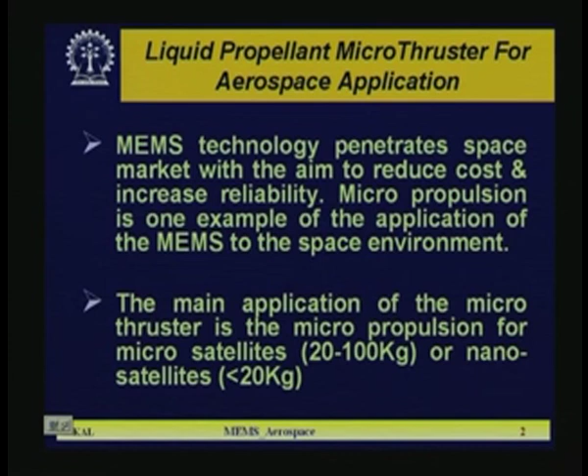The main application of the micro thruster is micro propulsion for microsatellites, meaning those whose weight is within 20 to 100 kilograms, and nanosatellites whose complete weight is less than 20 kg. So for those satellites, how they will be positioned accurately in a particular orbital system using a small sized micro thruster, that we will see today in today's lecture.

Now, what is propulsion? In a broad sense, propulsion is the act of changing the motion of a body. So when you are sending a spacecraft into space, many times you have to change the motion of the spacecraft so that you can accurately position the space vehicle in a particular orbital location.

So changing its motion is done remotely by using certain devices known as the thruster. You have to apply some pressure so that the whole satellite could be moved from one location to another. So the propulsion mechanism provides a force that moves bodies that are initially at rest.

Then change of velocity takes place, that is propulsion. So basically propulsion means it has to change its velocity or motion from rest, so that bodies which were initially at rest will move.

Rocket propulsion provides thrust by ejecting stored matter called propellant. There are various kinds of propellant. Lot of research is going on in propellant, high efficiency propellant. Some propellant examples I will cite today. So that is one major area of materials research in propellant.

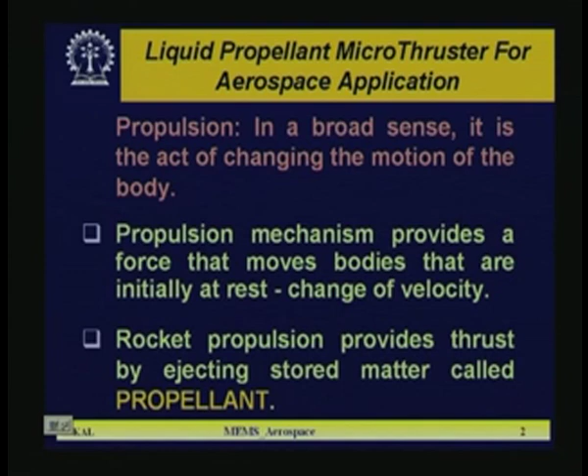Using propellant, how rocket propulsion can take place by using a micro thruster, that we will see today.

Now, what are the issues? What are the different classifications of the propulsion system? They can be classified according to different categories. One is type of energy source, whether the energy source is chemical, nuclear or solar. Depending on the type, different classes of propulsion systems are there.

Second category is basic function, whether the function of the propulsion is attitude control or orbit station keeping, east-west orbit station keeping or north-south orbit station keeping. That is one of the functions of the micro thrusters which use certain propellants, controlling the attitude of the space satellite.

Third one is type of vehicle, which kind of vehicle you are using - it may be aircraft, it may be missile. Also its size, type of propellant, type of construction and method of producing thrust. These are various broad classifications based on which we can categorize a particular propulsion system.

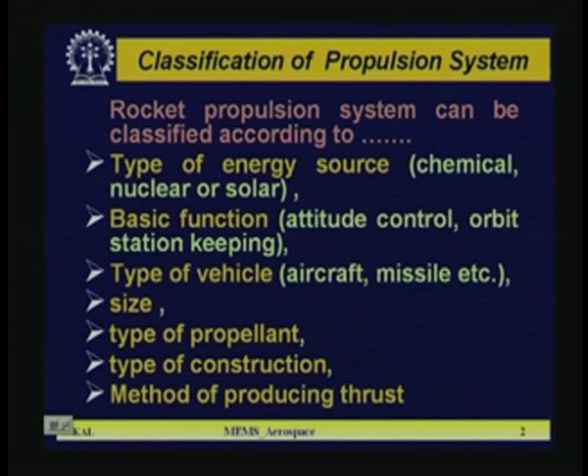Now, what is thrust and impulse? There are certain parameters based on which the propulsion system is identified or categorized. One is thrust, that is the force produced by rocket propulsion systems acting upon a vehicle, or the reaction experienced by its structure due to the ejection of matter at high velocity.

The main principle behind rocket propulsion is Newton's third law. You are ejecting some fluid, and because of that, in the opposite direction you get a certain thrust. That is the basic mechanism.

Total impulse, known as IT. For constant thrust, IT is given by F into T, where F is the thrust force and T is the burning time. Time multiplied by thrust force is called impulse. It is the total energy released by the propellant in a propulsion system, designated as IT.

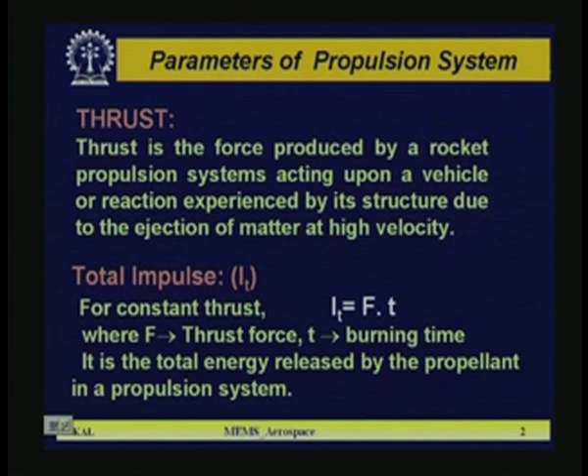Other parameter is specific impulse, IS. One is total impulse, the other is specific impulse. IS is defined as total impulse per unit weight of propellant - that means impulse per unit weight is known as specific impulse, IS. IS is the figure of merit of the performance of a rocket propulsion system.

Impulse I is basically F into dt, where force is m star into V2 dot dt. So F is m star V2, then IS is F dot dt divided by m star g naught and dt, where g naught is acceleration due to gravity, m star is mass flow, and dt is time, and F is thrust. Now if you simplify it, F dot dt is given by m star v2 dt, then it comes to v2 by g naught.

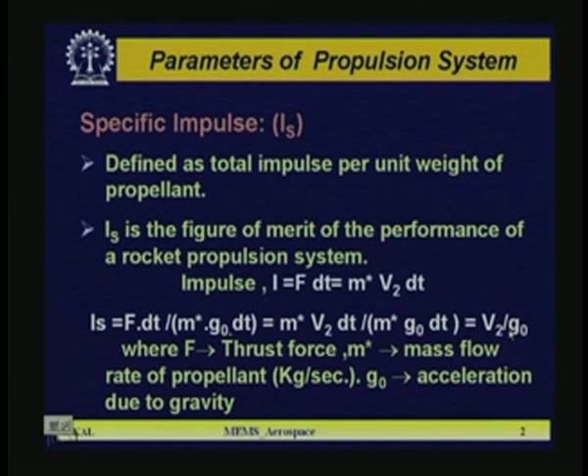So the specific impulse comes out to be v2 by g naught, where g naught is acceleration due to gravity and v2 is the velocity in that direction.

Other parameters are mass ratio, impulse to weight ratio, and thrust to weight ratio. Mass ratio is defined as the ratio of final mass mf and m naught, where mf is final mass and m naught is mass before rocket operation. This mass ratio is a parameter used to analyze flight performance.

Impulse to weight ratio is total impulse IT divided by propellant loaded vehicle weight W naught - IT by W naught is the impulse to weight ratio. Its high value means efficient design; impulse to weight ratio should be very high for an efficient propellant system.

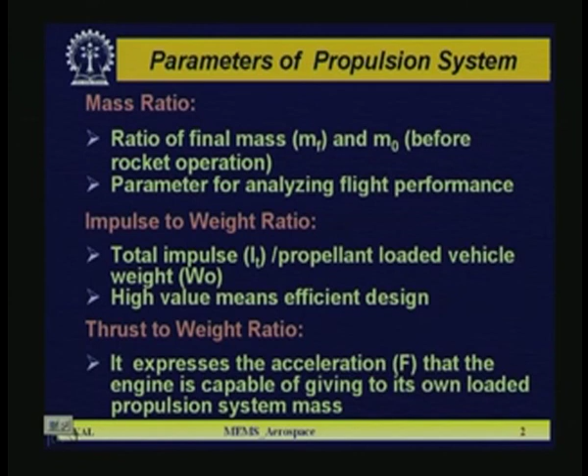Another parameter is thrust to weight ratio. It expresses the acceleration F that the engine is capable of giving to its own loaded propulsion system mass. So these are a few parameters.

Effective exhaust velocity is another parameter, defined as the average equivalent velocity at which propellant is ejected from the vehicle, denoted by Is dot g naught, which is nothing but F by m star. The thrust due to momentum change is given by F equal to dm dt into V2, which is equal to m star dot V2, where V2 is the exhaust velocity.

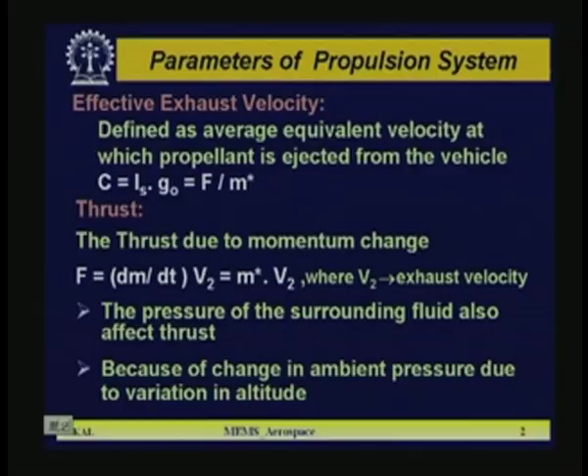The pressure of the surrounding fluid also affects thrust, because of change in ambient pressure due to variation in altitude. With altitude, the ambient pressure changes, and because of this change, the total value of thrust will change, because the exhaust velocity with altitude is going to change. Ambient pressure is different with altitude.

So F is given by m star V2 plus (P2 minus P3) dot A2, where P2 is the nozzle exit pressure, P3 is external or atmospheric pressure, and A2 is the cross sectional area at nozzle exit. P2 minus P3 is the difference of pressure between the nozzle exit and the atmospheric pressure. This parameter changes with altitude, and because of that the total thrust F is going to change.

To make P2 greater than P3, nozzle design is very important, because P2 minus P3 relates directly to nozzle exit pressure, which depends on the design of the nozzle. When P2 equal to P3, then F is equal to m star dot V2, and this is referred to as the nozzle with optimum expansion ratio.

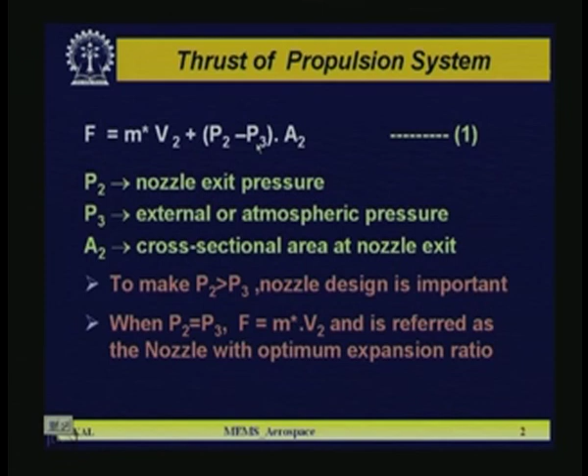Now, thrust of a propulsion system. There are certain issues relating to thrust in a propulsion system. Thrust of a rocket unit is independent of the flight velocity.

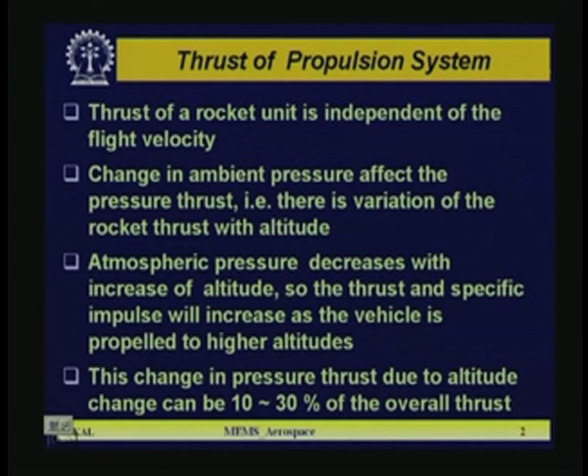Change in ambient pressure affects the pressure thrust, that is, there is variation of rocket thrust with altitude. Atmospheric pressure decreases with increase of altitude, so the thrust and specific impulse will increase as the vehicle is propelled to higher altitudes. This change in pressure thrust due to altitude change can be 10 to 30% of the overall thrust.

High specific impulse or high performance means high gas temperature and/or low molecular mass. What is the gas temperature? That which is ejecting from the propulsion system, and low molecular mass.

Next is low absorption of moisture, which often causes chemical deterioration. Since the propellant is a chemical, if it absorbs moisture, it causes chemical deterioration, the composition may change, and the efficiency of the propellant will also be affected.

Another issue of propellant characteristics is that it should be safe, in different aspects - safe from human hazard point of view and safe from environment pollution point of view. Because when launching a satellite, the propellant is ejecting, and this should not create nuisance to the atmosphere which may deteriorate the environment for living beings.

Low cost is another issue. It should be very simple and reproducible. These are some of the characteristics.

Low technical risk, such as favorable history of prior applications. That means anything you are going to adopt in space, you have to know certain history, because any technical failure will lead to loss of enormous amount of not only effort but also money.

Non-toxic exhaust gases - as I told you, it should not create pollution or disturb the environment or atmosphere. So what is the exhaust gases coming out of the propellant after burning? It should not produce any toxic gases. So these are some of the characteristics.

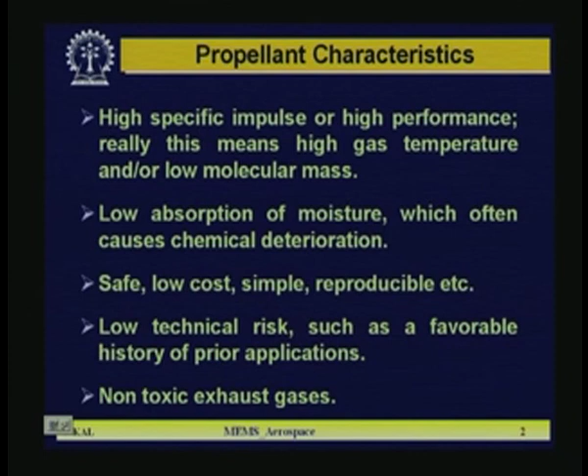The advantages - these are solid propellants, because water is a liquid propellant. There are two kinds of propellant used, one is solid propellant, another is liquid propellant. Basically it has to burn and produce some gases which will eject through the nozzle, as a result of which the device will push forward. A thrust is applied to the spacecraft or satellite, whatever it is - that is the basic objective. So the advantages of solid propellant are: simple design, few or no moving parts, will not leak or spill - if it is liquid there is a chance of leaking or spilling over - can be stopped and restarted few times if programmed, and can be stored for 5 to 25 years without any deterioration of the material.

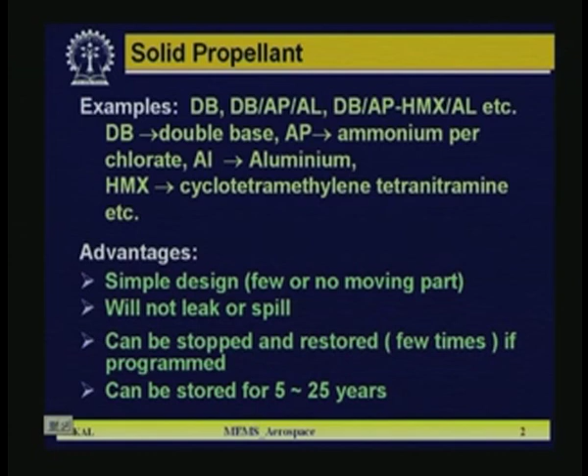On the other hand, there are disadvantages of solid propellant also. What are those? Explosion and fire potential is larger compared to liquid propellant - this is an explosive material in most cases, and is very prone to fire potential. It requires an ignition system, since it is an explosion it has to be fired, you need an ignition system. Each restart requires a separate ignition system.

Once you start it, then the second chamber you have to stop, then again if you have to fire the second chamber, you have to again put an ignition system. So each time if you want to fire it, you need an ignition system.

Exhaust gases are usually toxic in case of the solid propellant. Some propellant can deteriorate in storage, which is known as self-decompose.

Cannot be tested prior to use, because testing is highly risky, although sometimes it has to be done before actual implementation, but it is highly risky. Need very much safety precautions, because the total system is an explosive system and it involves lot of fire hazards.

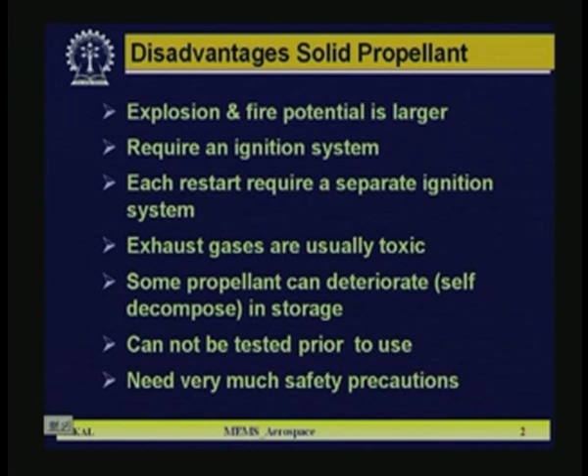Now this liquid propellant. Liquid propellants are, just to name a few, water, ammonia and hydrazine. These are the three liquid propellants which are commonly used.

Liquid propellant embraces all the various liquids used, and may be one of the following: it may be an oxidizer, that is liquid oxygen, nitric acid, etc.; a fuel, that is alcohol, liquid hydrogen, gasoline, etc.; or a chemical compound or mixture of oxidizer and fuel ingredients capable of self decomposition.

Any of the above, but with a gelling agent, behaves as thick paint. If you put some gel with that, it will not spill but can flow under pressure.

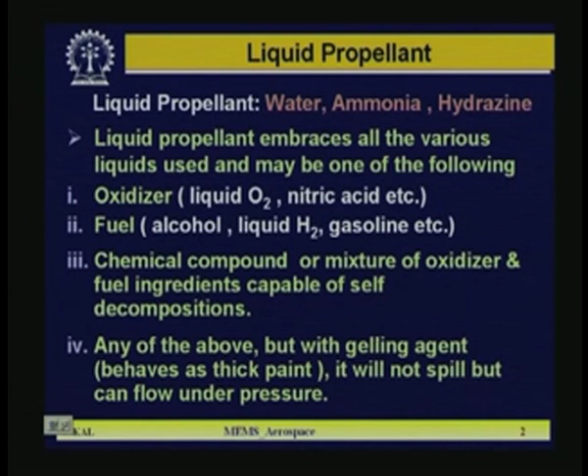So one advantage in case of solid propellant is that since it is solid, the spilling over problem will not be there. But in case of liquid, with very low density, there is a leakage kind of thing and some spillover problems always occur. So people try to mix some gelling agent so that its density will be higher and the problem of spilling over will be reduced. So these are the liquid propellants.

Now advantages of liquid propellant: it usually has the highest specific impulse, can be randomly stopped and restarted, which cannot be done in case of solid, can be largely checked out just prior to operation, can be tested at ground or launch pad prior to flight.

Most propellants have non-toxic exhaust, which is environmentally acceptable. These are the plus points in case of liquid propellant.

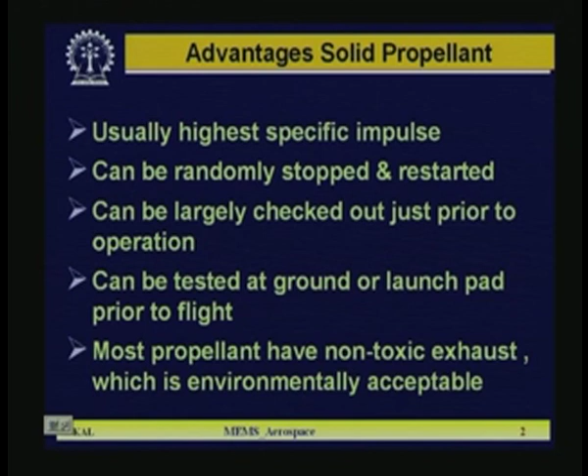Now disadvantages of liquid propellants are this: a relatively complex design, more parts or components leads to more things to go wrong. Since it is complex, a lot of parts will be assembled and any of the small parts may go wrong, which will compel us to leave the complete module.

Cryogenic propellant cannot be stored for long periods except when tanks are well insulated. Now this cryogenic propellant people are thinking of. So in that case you have to have tanks which are well insulated.

This liquid oxygen or liquid hydrogen, liquid gases basically, these are the cryogenic propellants.

Leaks or spills of several propellants can be hazardous, toxic, but this can be minimized with gelled propellants, which was mentioned in the earlier slide also. Tanks need to be pressurized by a separate pressurization system if you want to eject the propellant efficiently.

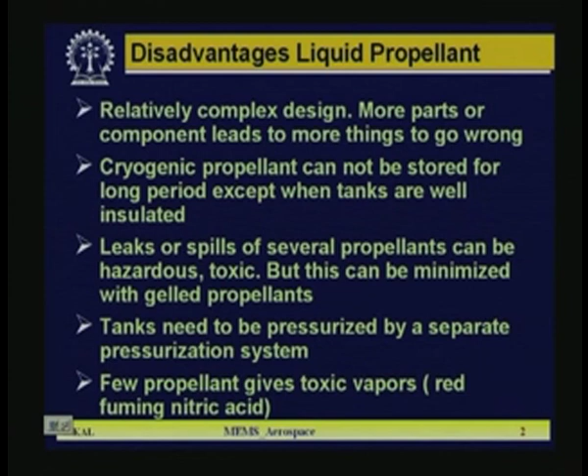Few propellants give toxic vapors, red fuming nitric acid in some of the propellants like hydrazine, that is not user friendly at all.

Now if you compare liquid versus solid propellant, then you can summarize like this. Liquid propellant engines seem to be preferred for space launch main propulsion units and upper stages because of their higher specific impulse, relatively clean exhaust gases, etc.

Favored for post boost control systems and attitude control systems, that is the plus points of liquid propellants.

On the other hand, solid propellant motors are preferred for missiles: air to air, air to surface, surface to air, short range surface to surface. For this kind of missile, solid propellants are sometimes favored.

It is also favored or preferred for ballistic missiles, long and short range surface to surface, because instant readiness, compactness, and the lack of leaks of hazardous liquids are important criteria for this application.

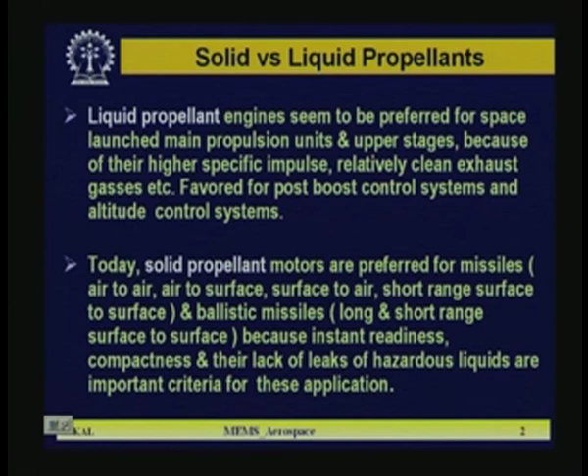So these are the main features of liquid and solid, where to use liquid and where to use solid. It depends on the choice of application. One is a space satellite, where liquid is preferred, and in case of missile programs, solid propellant is preferred.

Now micropropulsion development day by day proceeds like that. Initially it is cold gas system, then switched over to bipropellant thruster, that means not a single material, it is a mixture of material either solid or liquid, then monopropellant thrusters, then colloid thrusters.

Another kind of propulsion is field emission electric, because no liquid or solid propulsion systems are used, it is a field emission electric propellant sometimes used long time back.

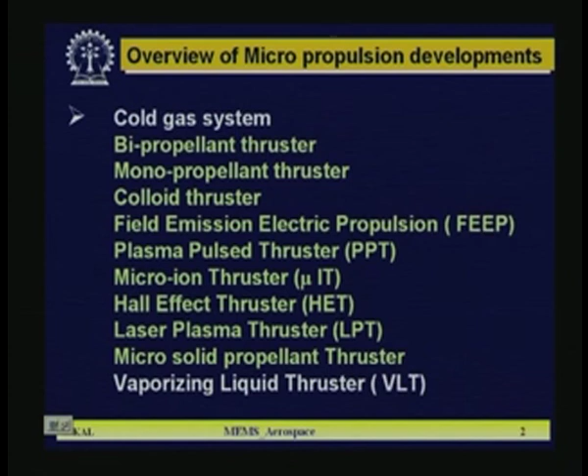Plasma pulse thrusters PPT, micro ion thruster MU-IT, Hall effect thrusters, laser plasma thrusters, micro solid propellant thrusters, and lastly vaporizing liquid thruster VLT. So in case of the micro or pico satellite program, the VLT, vaporizing liquid thruster, is drawing a lot of attention. Now we will just concentrate on the vaporizing liquid thruster, which is very promising and a lot of research is going on in that direction.

Vaporizing liquid microthruster (VLT) is a typical example of a MEMS-based micropropulsion device. It can be easily fabricated using MEMS technology, micromachining technology. The change of phase from liquid to gas is exploited to produce thrust.

Liquid is used initially in the propulsion chamber, then converted into gas, and we force the gas to eject from narrow nozzles, which produces thrust. That is the basic principle.

It requires a heating resistor, a vaporizing chamber, a nozzle, a propellant inlet, and a micro channel. These are the components of the microthruster.

You have to have a heating element, a resistor. It may be embedded or it may be a surface thin film resistance, which can be powered to heat the propellant. You also have to have a vaporizing chamber.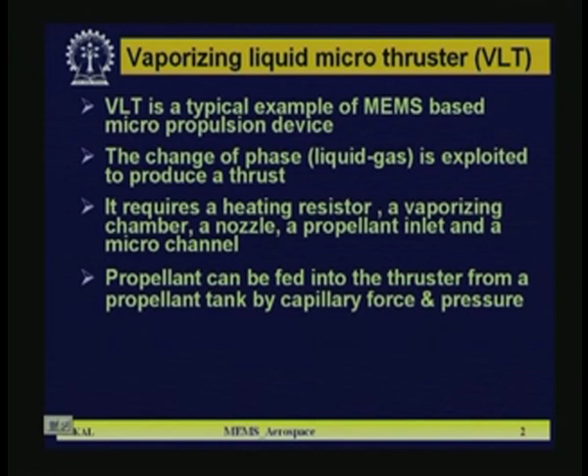Propellant can be fed into the thruster from a propellant tank by capillary force or pressure. For pushing the propellant into the cavity, if you have to use a pump, that adds more components, which increases the total weight of the microthruster as well as the cost. That is why in micro or pico propulsion, ordinarily the capillary force or pressure inside the capillary is used to flow the propellant from the tank to the small capillaries inside the device through the micro channels.

Now here is a schematic diagram of the vaporizing liquid microthruster, VLT. Different structures of VLT have been proposed. Here, one structure used by researchers at the University of California is shown in the figure.

You can see the fluid input here through the nozzle. It is completely made of silicon; the bottom piece is silicon and the top piece is glass. Here is a vaporizing micro chamber formed by micromachining silicon, then a small channel, and at the end an exit nozzle. A heater is embedded into the silicon.

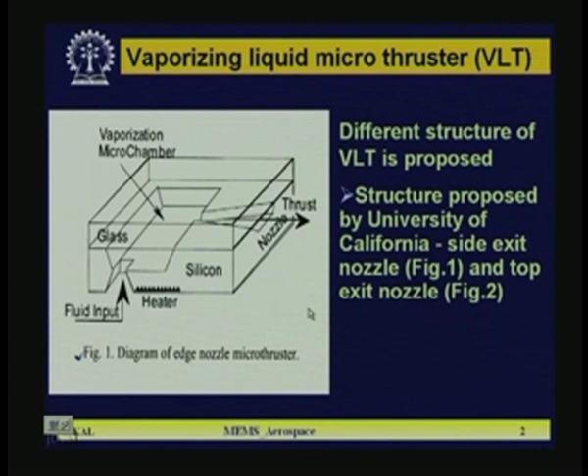If you heat the silicon through that heater, in the vaporization chamber the propellant phase changes from liquid to gas, and it exits through the nozzle, producing thrust in the opposite direction. If the gas propellant moves in one direction, the thrust is created in the opposite direction. That is the basic diagram of the edge nozzle microthruster.

There is another category of microthruster with an asymmetric design, where instead of the bottom, the heater is placed on the surface of the thruster. Since silicon is an excellent thermal conductor, they are not directly heating the propellant at the surface, but heating the complete silicon material. Contacts are made here, since silicon is a good thermal conductor.

The propellants are injected in one hole and ejected from another. All the design aspects are crucial to get greater efficiency. The bottom plate is completely Pyrex glass, and if this is the width, the height of the chamber is half of the complete width of the silicon device. This is the nozzle, here is the chamber, and here is another nozzle which may be the input, with the other being the output nozzle.

Glass is used to seal the micro chambers, in what is called the asymmetric design. Glass was used only to provide a window for visual observation of fluid flow. Since the bottom piece is glass, you can easily see how the fluid flows through the chamber.

Asymmetric means the whole structure is not made of the same material - the bottom is glass and the other is silicon. There are certain microsystems where both pieces are silicon, which is a symmetrical structure. So this is another form of the microsystem.

In both cases, the basic principle is the same: vaporization of the fuel in the microchamber has a longer pre-vaporizing warm-up time because heat is being delivered only to one side.

Why one side? Because the heater is put in only one side, in the silicon, not in the bottom side. The bottom side is only glass. So that side needs some warm-up time so that enough heat changes the phase from liquid to gas of the propellant.

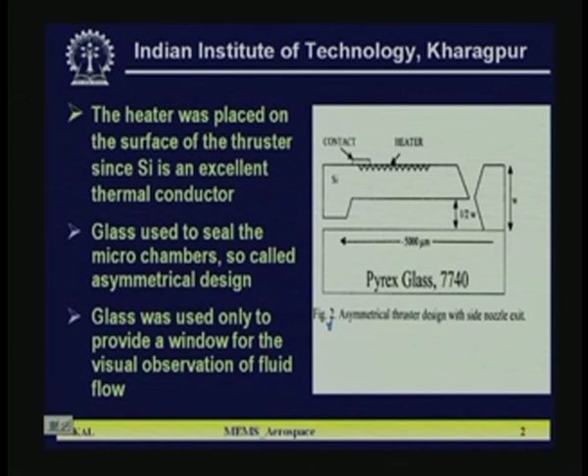So even with the glass cover, the silicon containing diffused heaters provided sufficient thermal contact and conductivity to effectively heat the microchamber. This design is more power efficient and allows thermal input from heaters on both sides, utilizing the high thermal conductivity of silicon. If you fit a resistor on one side asymmetrically, your power requirement is less, but if you allow certain time, you get sufficient thermal contact, and it is power efficient.

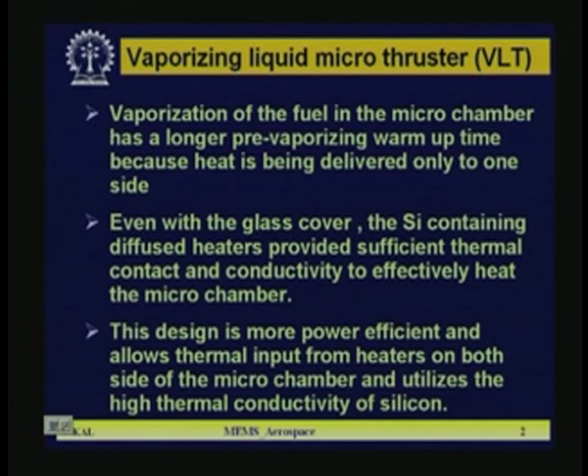Now, what is the fabrication procedure? The bottom was the glass and the top was the silicon, on which you make nozzles, chambers, etc.

They started with p-type silicon 100, thermal oxidation of 0.8 micron, and photolithography for the heater pattern. First you design and fabricate the heater, which is an embedded heater. The heater can be made using diffused resistance through silicon, structured like a meander line, similar to a coil, but instead of a coil you use diffused resistance embedded in the silicon. When power is applied, it heats up, and since silicon conducts heat well, it transmits heat into the propellant. So phosphorus diffusion is made.

This gives 10 to 11 ohms per square. A stripped drive-in oxide is grown, 500 angstrom thin stress-relieving oxide, DTO. That is the process which was followed, as reported in the literature.

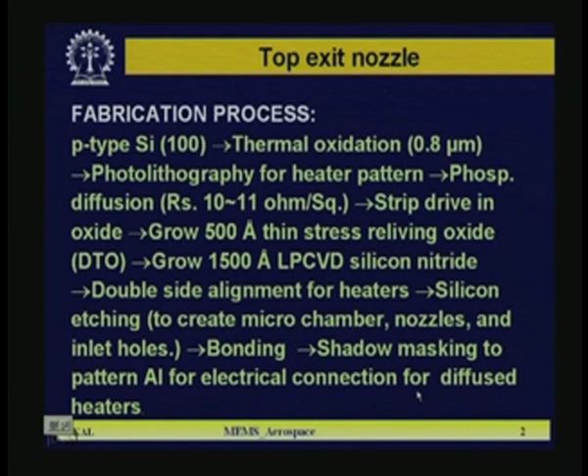Then bonding, which is substrate to glass bonding, followed by shadow masking to pattern aluminum for electrical connections for the diffused heaters. Because at the end, once you make the electrical connection, the complete structure is not exactly planar, so you cannot use regular lithography. You have to go for the shadow masking technique, which I mentioned in earlier classes, where inside a vacuum chamber, through a stencil, you make the metal pattern for contacts.

Now this is another alternate microthruster structure proposed in some literature. Here, instead of embedded heaters, they use thin film heaters, made using titanium material for the heaters.

You can see here there are two structures, one top and one bottom. The bottom wafer contains the inlet channel. In the earlier case, it was a heterogeneous structure with one glass and one silicon piece, and both inlet and outlet were made in silicon. But here both pieces are silicon, with the inlet in the bottom piece and the outlet in the top piece.

In the bottom piece, besides the inlet, they form the heater by patterning titanium on the surface of the silicon, as seen in the cross-sectional view. You cannot see the total meander line, only a black patch, with two leads. In the top wafer, besides the nozzle, they etch another hole through which they make the wire bonding. After wire bonding and taking the wires outside from the titanium heater, they fill the hole at the end with some glue so it is completely covered.

One advantage here compared to others is that with minimum amount of power you can get maximum phase change and ejection of the liquid. So ejection of the gases, basically liquid forms gas and that will eject, but embedded heater may require more power.

But here one disadvantage is that this titanium film which is used as a heater has to be insulated. On top of that, you have to have a passivating layer, so that it should not be in direct contact with the propellant. Otherwise the propellant may react with the titanium and damage or change the resistance value, and in due course of time it can be completely etched away if the propellant is highly toxic and reactive.

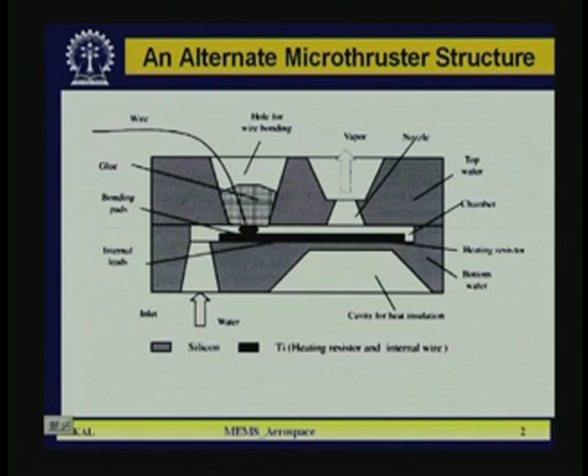So this is the alternate microthruster structure which has been proposed by some group, and the basic feature of that alternate structure is the following.

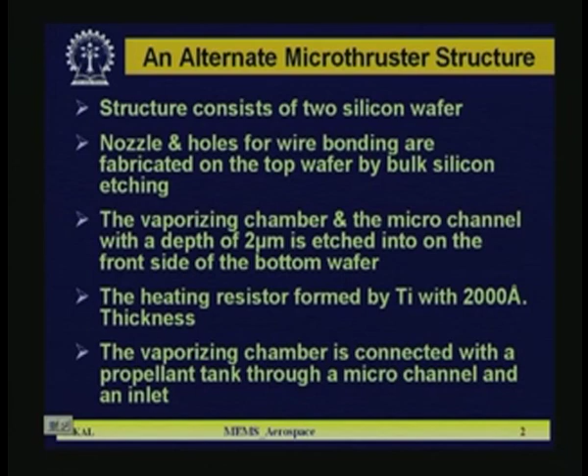The structure consists of two silicon wafers. Nozzle and holes for wire bonding are fabricated on the top wafer by bulk silicon etching, meaning you have to have a separate hole for bonding the heater which is inside the chamber. The vaporizing chamber and micro channel with a depth of 2 microns are etched on the front side of the bottom wafer. The heating resistance is formed by titanium with 2000 angstrom thickness. The vaporizing chamber is connected with the propellant tank through a micro channel and inlet.

Now another class of microthruster is sometimes known as the digital propulsion microthruster chip. Earlier ones are called analog; here we call it digital. Why? It gives some kind of discrete propulsion in different directions, that is why it is known as digital.

Here the basic principle is the same: some propellant will be vaporized and ejected, and according to Newton's third law, some thrust will be created in the opposite direction. But here what is done differently is that three dies are used.

One is the top die where diaphragms are made of silicon membrane, by thinning down you make the membrane. The middle die has etched grooves, and each groove contains some propellant filled in it. The bottom die has a resistor made of polysilicon, which we call the igniters, with direct interconnects to bond pads. No electronics is present in the chip.

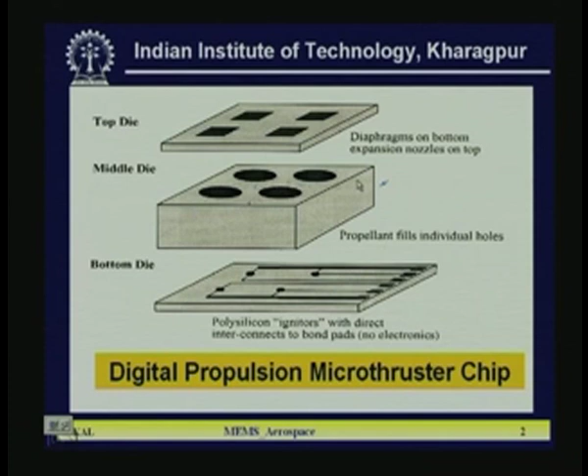Now we propose a microthruster structure which is very simple and homogeneous also, and there you can see an inlet is here.

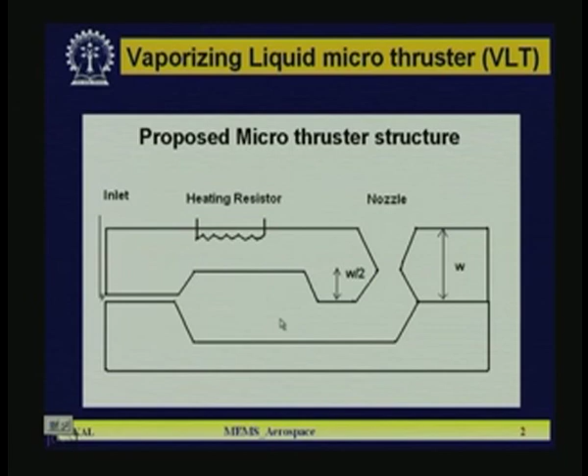This is the heating resistor, this is the nozzle, and what will be the optimum size that we have to select, and what should be the chamber size, that is also selected. So a structure like this can be made very easily in the laboratory.

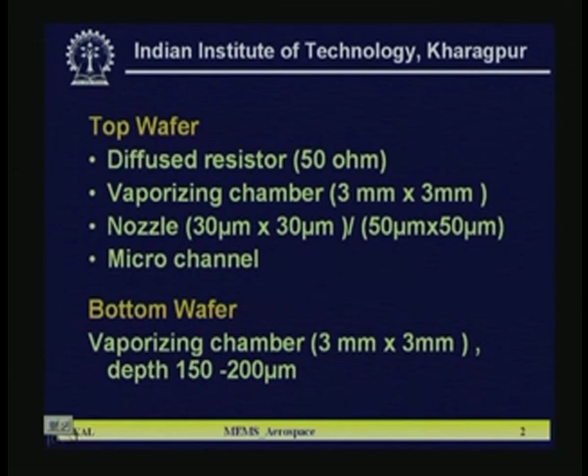Here, for the top wafer, we fabricate diffused resistors of 50 ohms. The vaporizing chamber is 3 millimeter by 3 millimeter, the nozzle is 30 micron by 30 micron, and micro channels will be there. The bottom wafer has a vaporizing chamber of 3 millimeter by 3 millimeter, with depth of 150 to 200 micrometers.

Now we explain one structure which we have fabricated in our laboratory at IIT Kharagpur. We selected this structure because we have enough facility to create a similar structure using bulk micromachining technology. Here again we are using two wafers, one top and one bottom.

In the top wafer you can see there is a propellant inlet, this is the tank, and through the tank there is a flow channel through which the propellant will flow. This is the vaporizing chamber and this is the exit nozzle, and this is the complete width. We have the heater in the bottom piece.

The propellant inlet dimension in the top is 1 millimeter by 1 millimeter, and on the bottom side 0.2 by 0.2 millimeter, because the top and bottom dimensions of the propellant inlet are different.

Micro channels are 0.7 by 0.25 by 0.05. Exit nozzles are these sizes: 30 by 30, 50 by 50, 70 by 70. We tested different exit nozzle sizes to see which is more efficient.

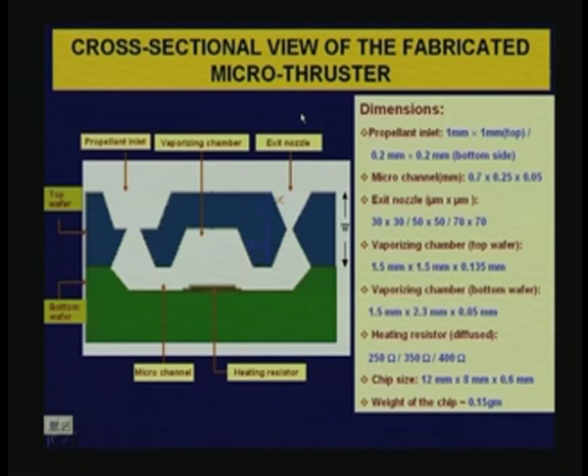In the top wafer there are two features: one is the propellant inlet, another is the exit nozzle. In the planar view, you can see the top wafer's top side with the propellant inlet and the exit nozzle, and the same top wafer's bottom side looks like that. Apart from these two, the inlet and exit nozzle, there is a vaporizing chamber.

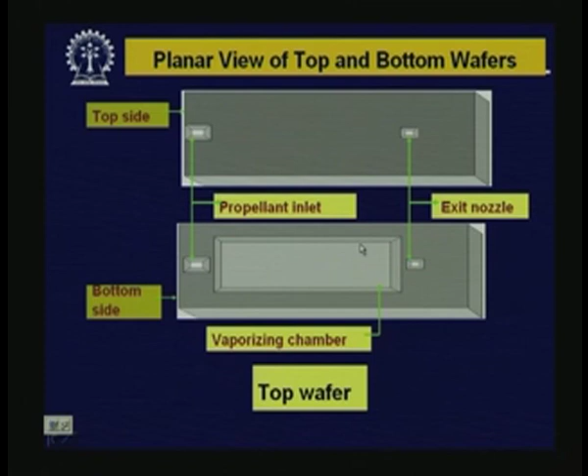In the top wafer, the vaporizing chamber is also etched. The vaporizing chamber consists of both the top and bottom wafer, so the top looks like that. Now if you look at the bottom wafer, basically there is an embedded heater.

This is the heater, a heating resistance, which we made using boron diffused resistance of 250, 350, or 400 ohms - three different resistances we used. Here is one micro channel through which the liquid propellant can push. These are the heating resistors.

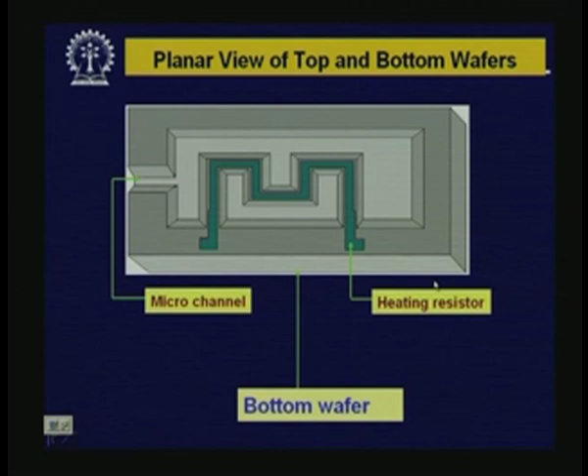So the bottom wafer. Now, the total energy required to vaporize the liquid is QT, which is the sum of two parameters, Q1 and Q2, where Q1 is the energy required to raise the temperature of the fluid to the vaporizing point, given by m into C into delta T,

where m is the mass of the fluid, C is the heat capacity, and delta T is the temperature difference between the initial and vaporizing point. Q2, the second term, is the energy required to vaporize the liquid at the vaporization point, that is the latent heat - nothing else - given by m into LV, where LV is the latent heat of vaporization and m is the mass. First, from room temperature to the vaporization point is Q1, and from the vaporization temperature to actually making it vapor, you need the latent heat amount of energy, which is Q2.

Total Qt is equal to Q1 plus Q2. Now thrust force corresponds to the reaction of the structure due to the ejection of hot gas at high velocity, which we calculate using F equal to m star multiplied by V plus P2 minus P1 into A, where m star is the mass flow rate, V is the exhaust gas velocity, P1 is external or atmospheric pressure, P2 is nozzle exit pressure, and A is the cross sectional area at nozzle exit.

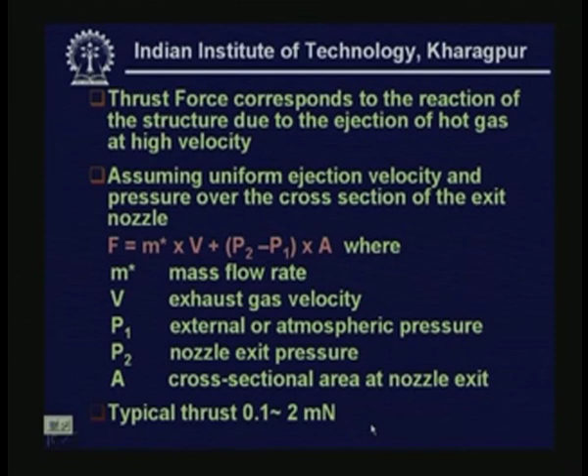Typical thrust obtained from this micro thruster is 0.1 to 2 millinewton.

If you put a very thin membrane, and put a laser beam on the membrane, then if the vapor causes the membrane to vibrate, the laser will be deflected. From how much it is deflected, you can calculate how much thrust is created. In this indirect way, you can calculate the amount of thrust created by the device when the propellant comes out of the exit nozzle.

So that is, as shown in the earlier slide, 0.1 to 2 millinewton.

Now thrust efficiency is one of the important issues. It accounts for all the energy losses that do not result in kinetic energy - whatever energy you are supplying must be transmitted to kinetic energy, so if something is lost, your efficiency will be lost.

What are the parameters which can degrade the efficiency? Waste of electrical power, unaffected or improperly activated propellant - proper propellant utilization is necessary - loss of thrust resulting from dispersion of the exhaust, and heat loss. All these issues have to be taken care of to get greater thruster efficiency.

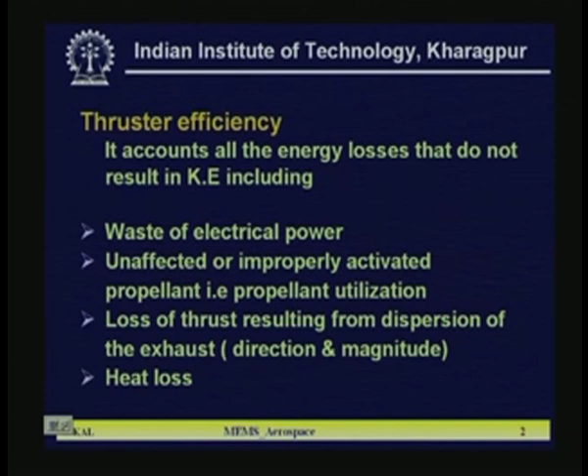Now, the application of micronewton, millinewton and newton thrust in different cases. For east-west station keeping and attitude control, you need micronewton kind of thrust, and this is operational and used nowadays - for 15 to 20 years it's been working, it's live.

Millinewton kind of thrust is required for north-south station keeping and for orbit changes, which is also operational. 0.2 to 10 Newton is for orbit raising, active for 1 to 3 years, still under development stage. So micronewton, millinewton and 10 Newton are required for orbit raising - these are the different applications.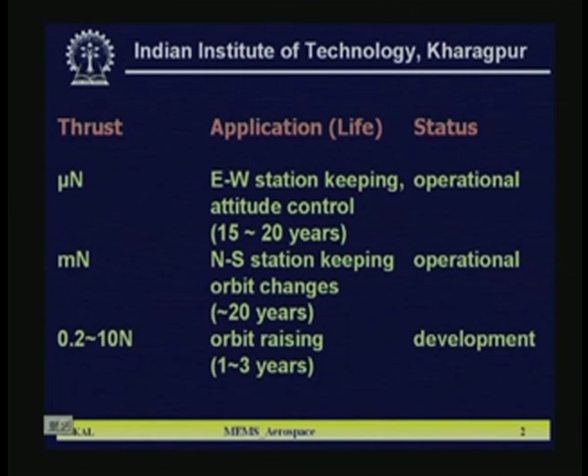Now, overcoming translational and rotational perturbations in satellite orbits such as NSSK - north-south station keeping - and EWSK, east-west station keeping, of satellites in geosynchronous orbits, or aligning telescopes or antennas in low LEO or medium earth orbits. LEO is low earth orbit and MEO is medium earth orbit.

Potential missions such as interplanetary travel are also candidates for electrical propulsion - for example, return to the moon or mission to Mars, which require high thrust and power. A lot of R&D is going on in this direction so that these things can be produced in miniature form, and a lot of innovative research can be carried out in the near future using MEMS devices.

So, in this lecture I gave you a small preamble of a particular microthruster which is being used in micromachining technology, and it is also one of the programs in our country's space program. So, let me stop here today. Thank you very much.